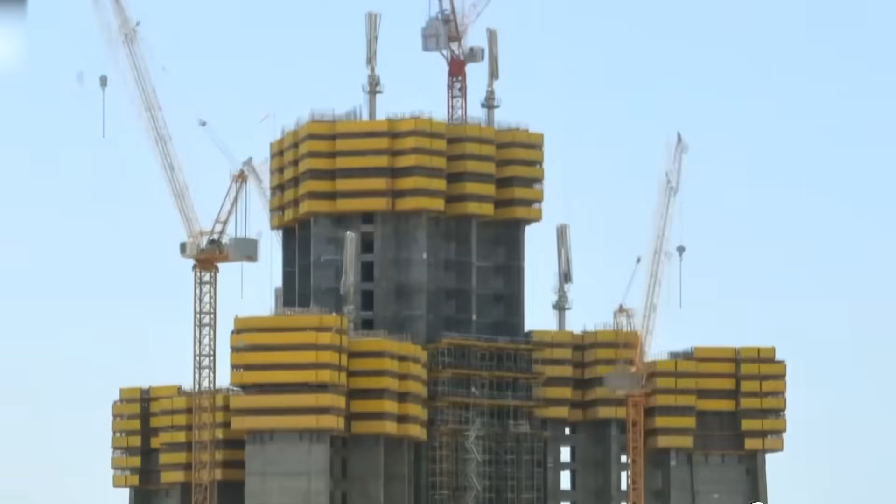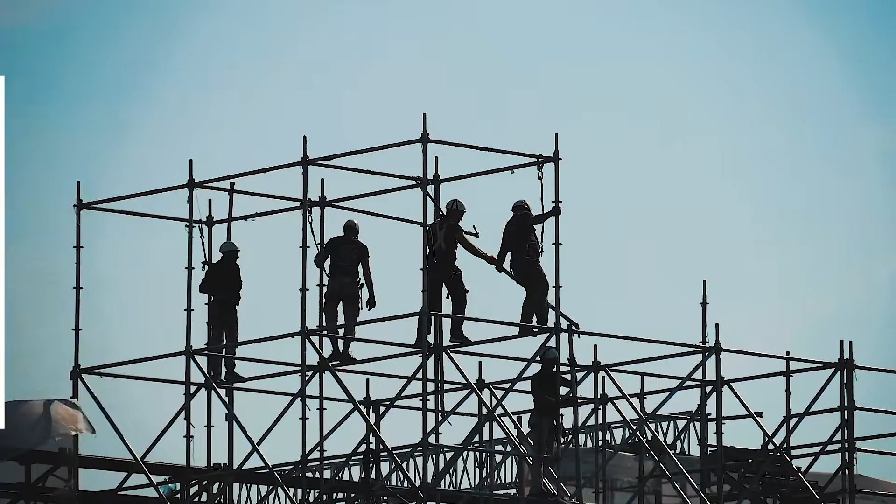Right now, as you watch this video, somewhere on the coast of Saudi Arabia, a tower is growing. Not by meters, not by weeks, floor by floor, every single day. This is the Jeddah Tower, and it is on a mission to become the tallest structure ever built by human hands. 1 full kilometer into the sky.

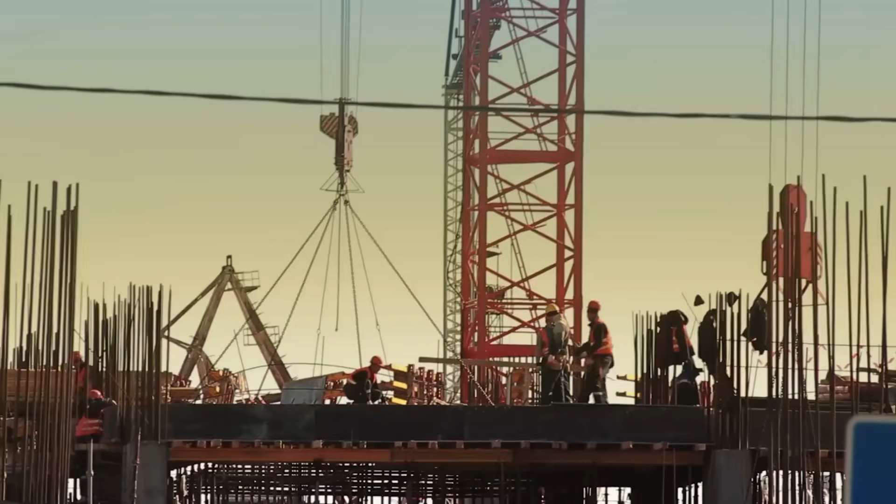That's taller than any building in history. Taller than the Burj Khalifa by 173 meters. So tall that at the top, you will literally be standing in the clouds. But here's what makes this story insane.

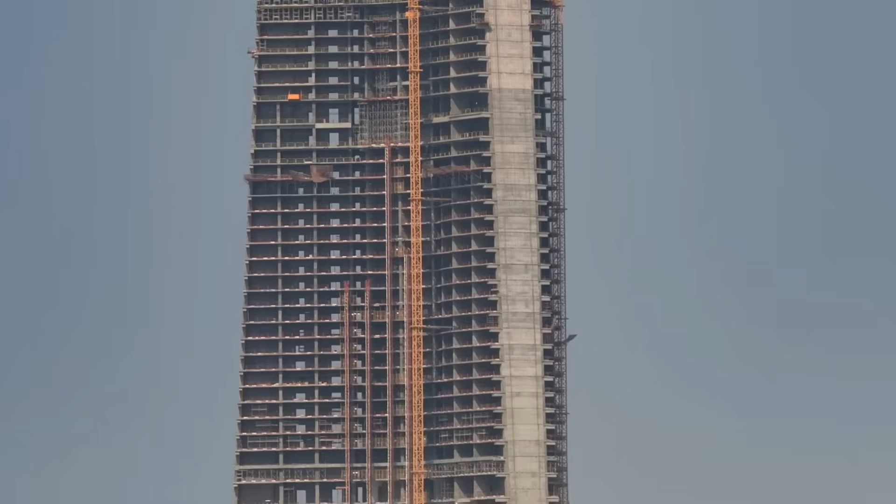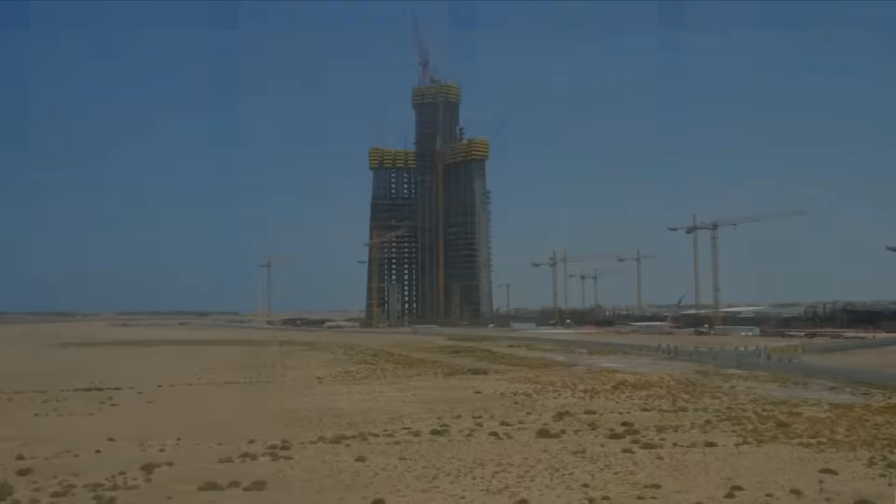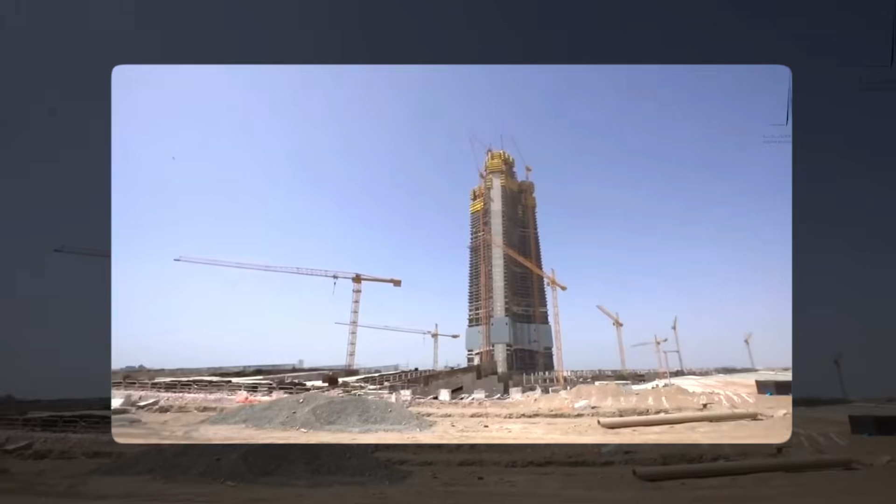This tower was abandoned for 7 years, left as a concrete skeleton on the Saudi coastline, the ghost of an impossible dream. And now, it's back, faster than ever, racing to reach a milestone that has never been touched in the entire history of construction. This is not just a building story. This is a story about ambition, power, arrest, billions of dollars, and a race against time. Let's go.

The year is 2008. Saudi billionaire Prince Alwaleed bin Talal stands in front of his team and makes an announcement. He wants to build the tallest tower in the world. Not just taller than the Burj Khalifa, which is still under construction at the time. He wants to go 1 full mile into the sky. 1 mile. That's 1,600 meters. Nearly double what would eventually become the Burj Khalifa.

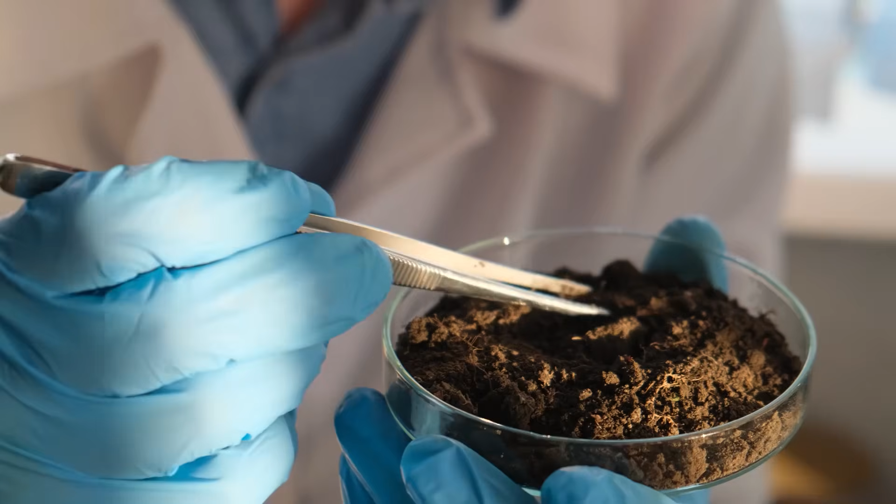The engineers told him it was impossible. The soil tests came back and confirmed it. The ground in Jeddah cannot support a 1-mile tower. The plan had to be scaled back, so instead, they settled for 1 kilometer. Just a kilometer, no big deal.

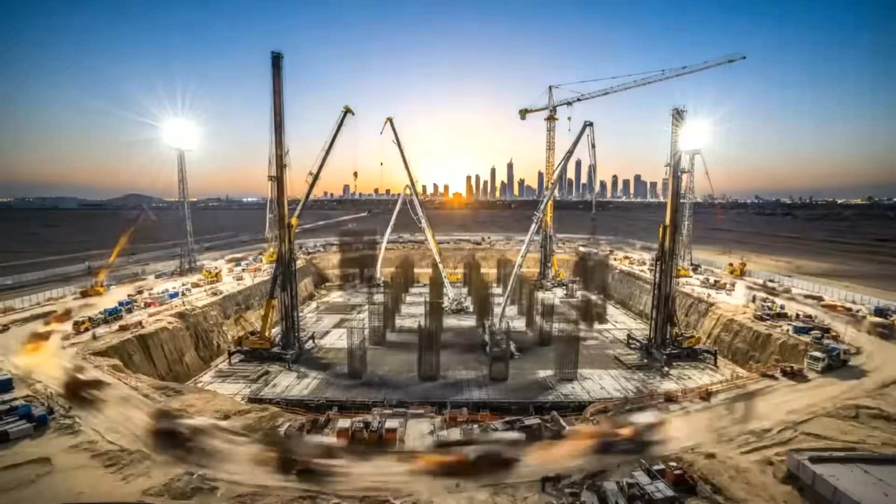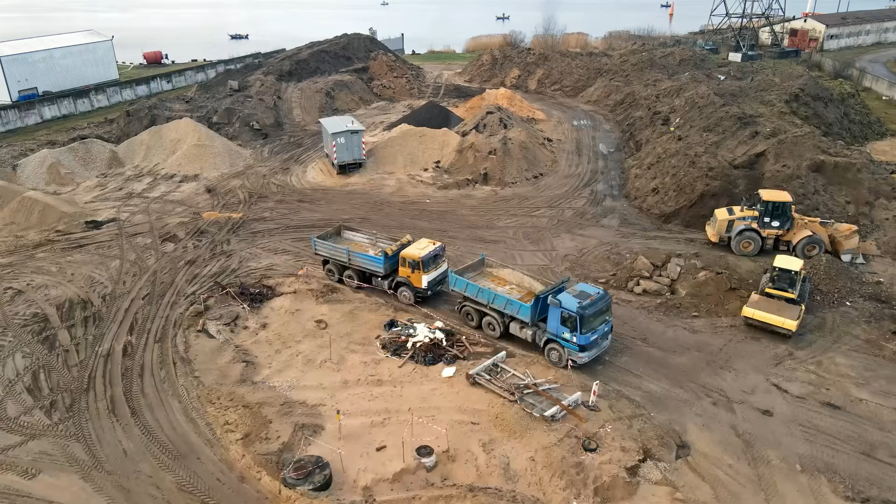Construction officially begins in 2013. The architect is Adrian Smith, the same man who designed the Burj Khalifa. The contractor is Saudi Binladin Group, one of the most powerful construction firms in the Middle East. Everything is aligned. The money is there. The talent is there. The ambition, off the charts. And then, Saudi Arabia shook.

November 2017, Crown Prince Mohammed bin Salman, MBS, launches what he calls an anti-corruption purge. Hundreds of powerful Saudis are rounded up, arrested, held inside the Ritz-Carlton Hotel in Riyadh. Yes, a luxury hotel becomes a prison.

Among those detained, Prince Alwaleed bin Talal, the man behind the Jeddah Tower, and Bakr bin Laden, the chairman of Saudi Binladin Group, the main contractor building the tower. Half-brother, by the way, of Osama bin Laden. The 2 most powerful men behind the world's most ambitious skyscraper, both arrested within weeks of each other.

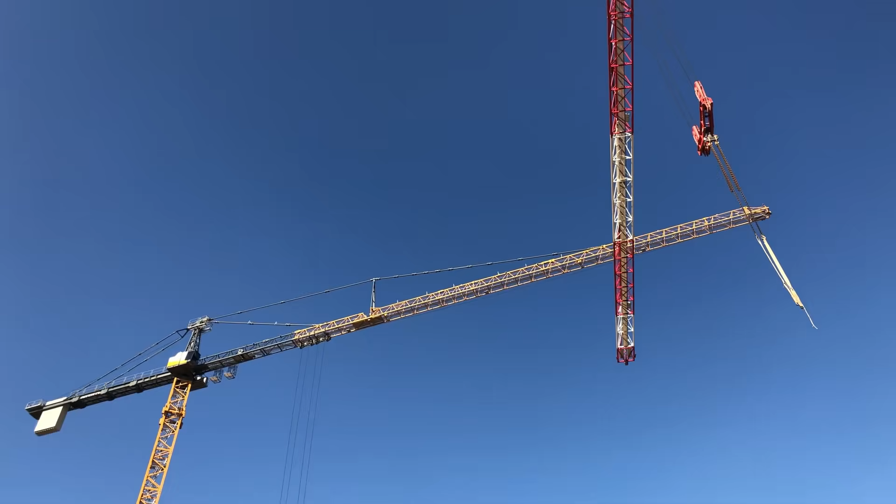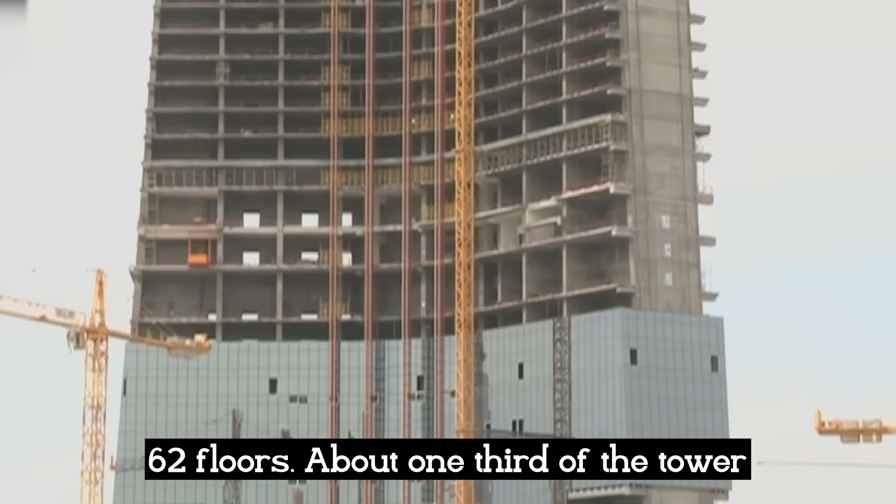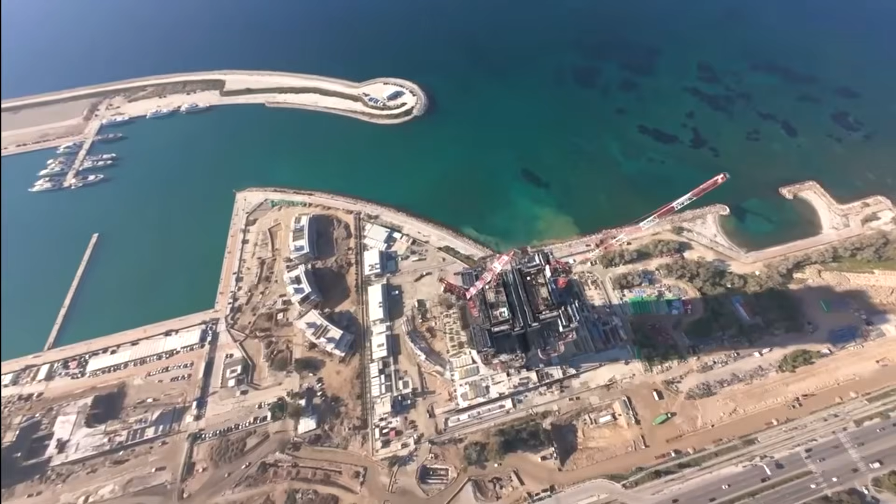Construction limps on for a few months. Workers show up, cranes keep moving, but the leadership is gone, the money is frozen, and by January 2018, everything stops. 62 floors, about 1/3 of the tower, done, and then silence. The cranes stopped moving, the site went dark, and for 7 years the Jeddah Tower stood as an unfinished concrete shell. A monument to what happens when ambition collides with power.

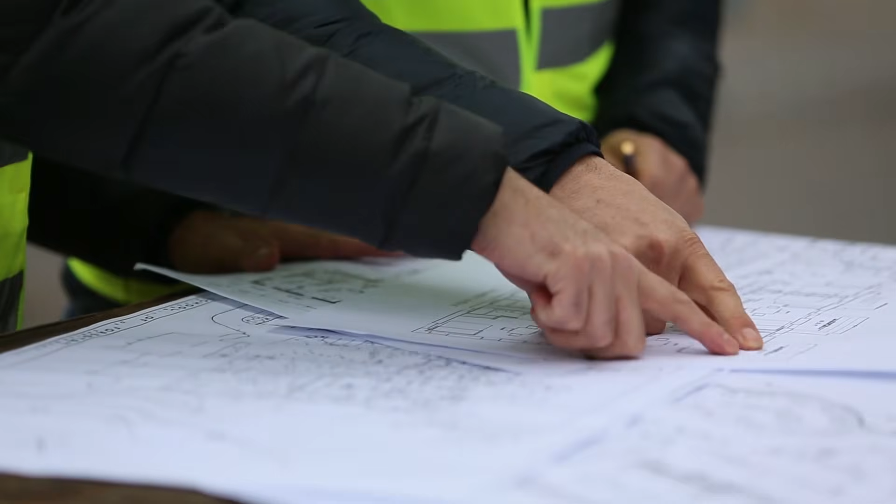But here is the twist. Alwaleed was released after 3 months. He paid an undisclosed settlement to the Saudi government. Bakr bin Laden walked free in 2021 after 3 years. And the firm that was arrested, Saudi Binladin Group, they were hired back in 2024 to finish the very tower their chairman had been arrested for. You genuinely could not write this.

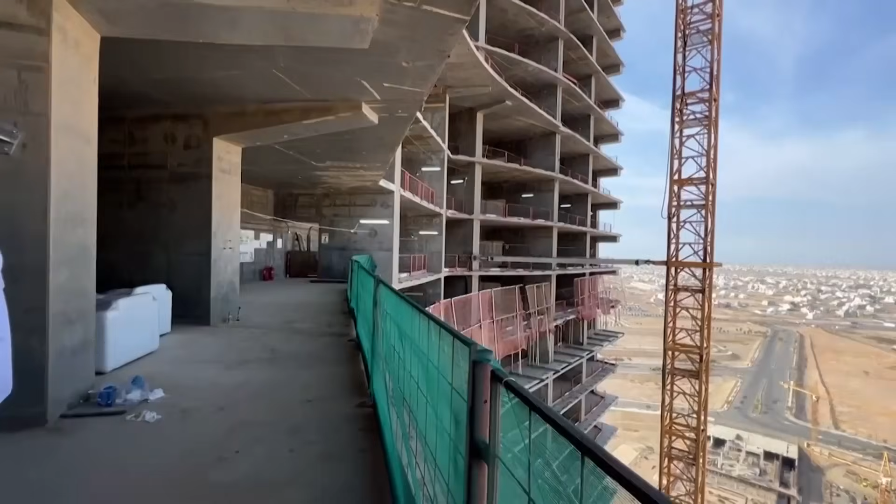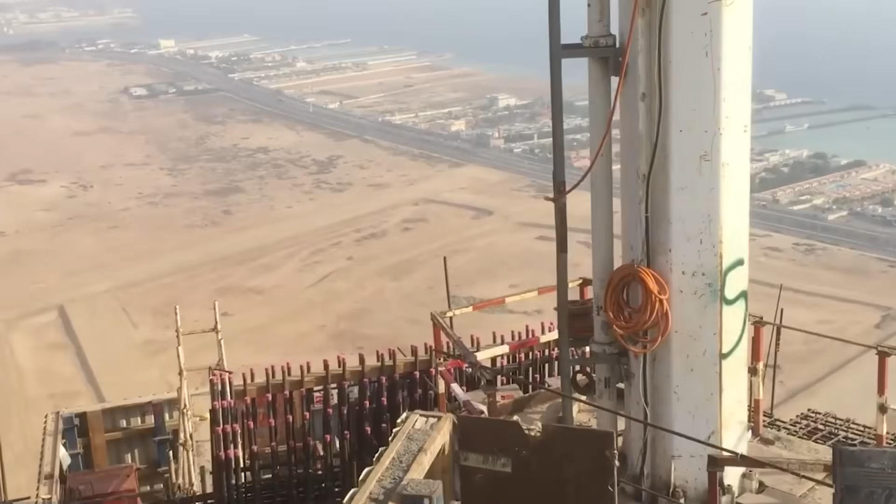Between 2018 and 2023, the Jeddah Tower stood frozen. COVID hit. The Saudi economy shifted. Oil prices went through cycles, and the tower just waited. Satellite images from those years show an eerie sight. A massive construction site, cranes still standing, but nobody home.

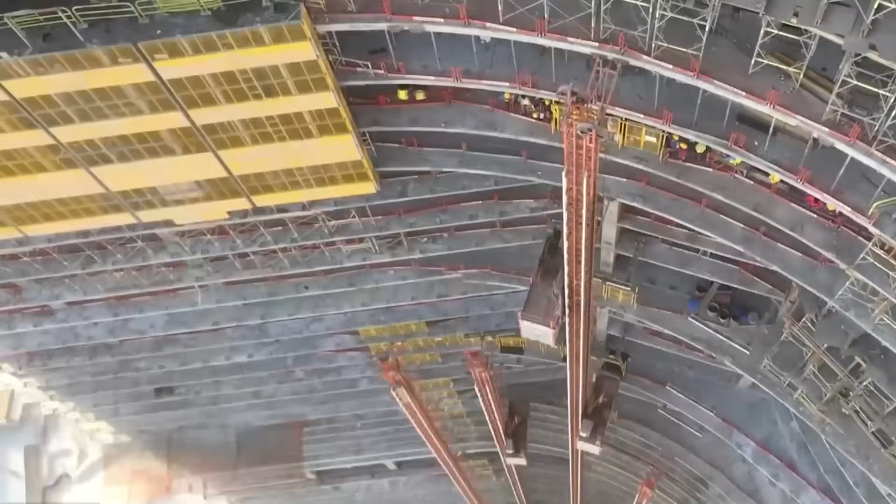Then in September 2023, something changed. Jeddah Economic Company quietly sent out requests for bids. 14 contractors from Europe, China, and the Middle East were invited to submit proposals to finish the job. It was happening. In October 2024, a ceremony was held on site. Prince Alwaleed himself showed up. He posted a video on X, a gleaming render of the finished tower, with a single caption, "We're back."

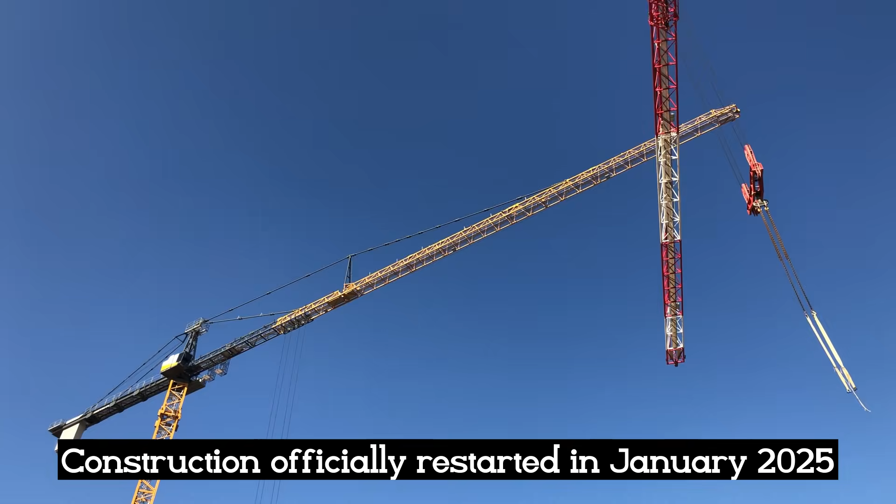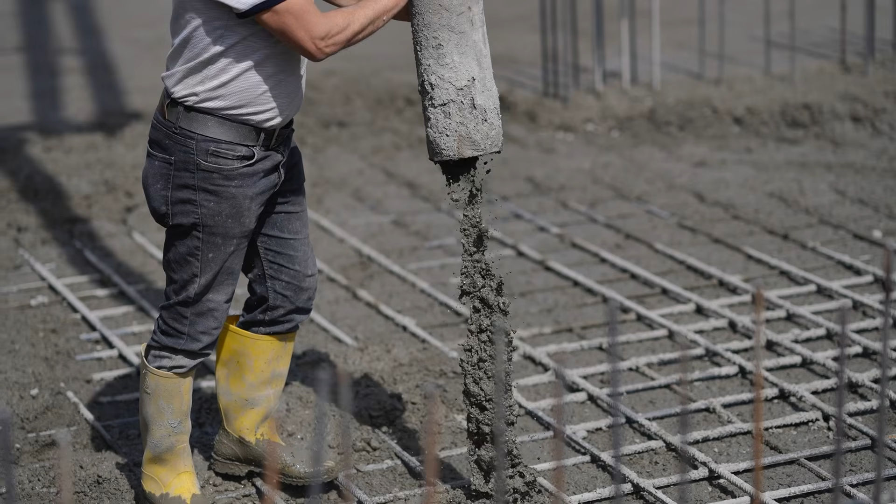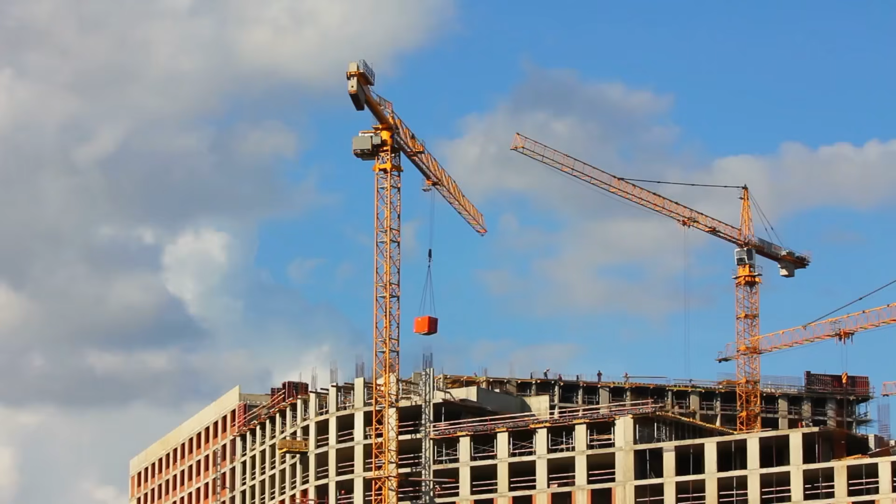Construction officially restarted in January 2025. And what happened next shocked even the engineers. When construction resumed, the pace was unlike anything seen before on this site. One floor every 3 to 4 days. Think about what that means. You go to sleep. You wake up. The tower is higher. Multiple cranes working around the clock.

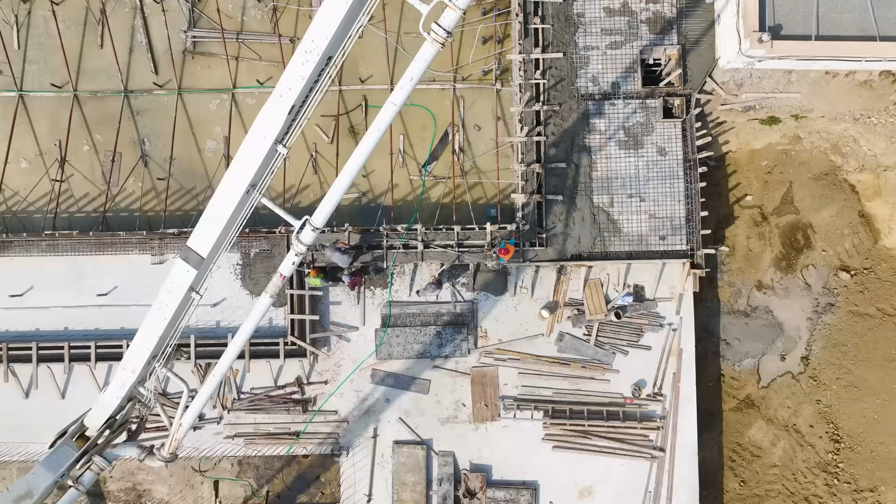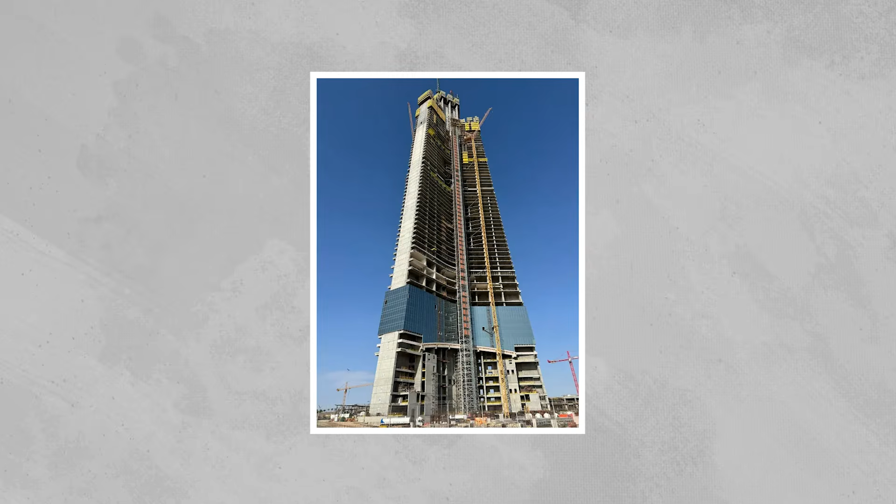Advanced pumpcrete systems pushing liquid concrete upward through pipes, hundreds of meters into the air. A workforce of over 5,200 people on site daily. By April 2025, just 3 months in, the tower had reached its 66th floor, past where construction had stopped in 2018. By August 2025, it passed 75 floors.

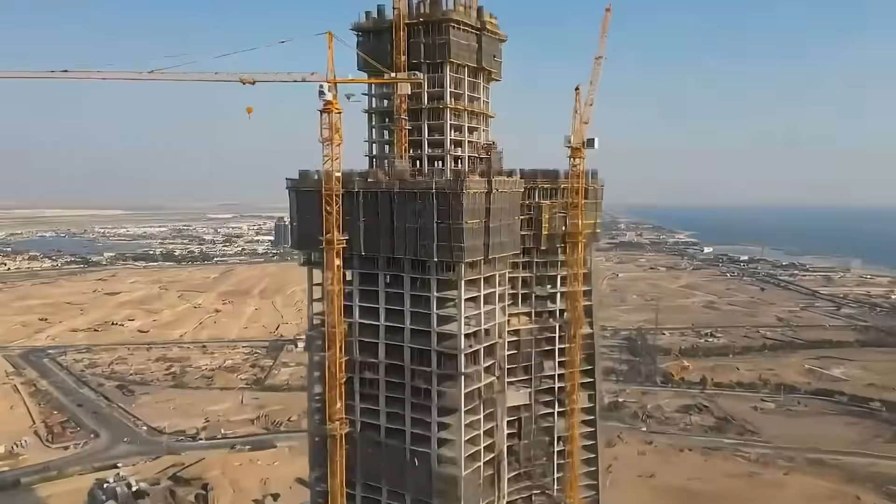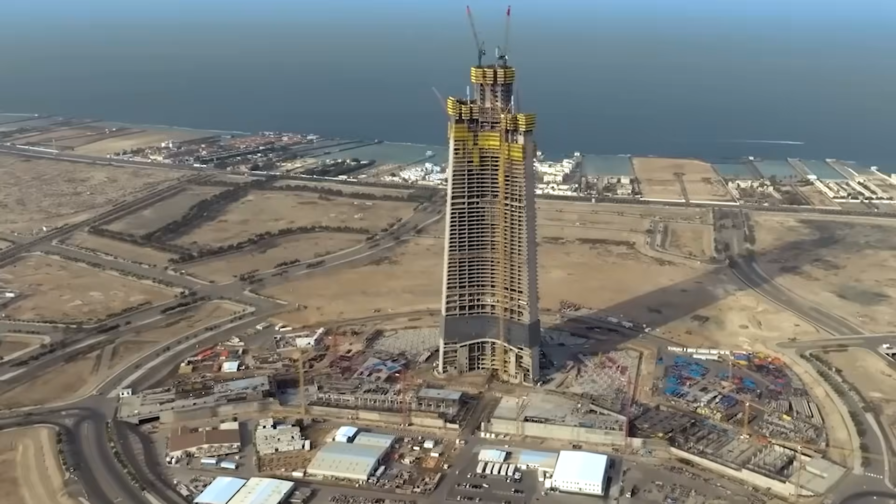By December 2025, it crossed 80 floors. And as of this video, the tower has passed its 95th floor, standing at 370 meters tall. It is on track to reach its 100th floor in the coming weeks. But the numbers alone don't tell the full story.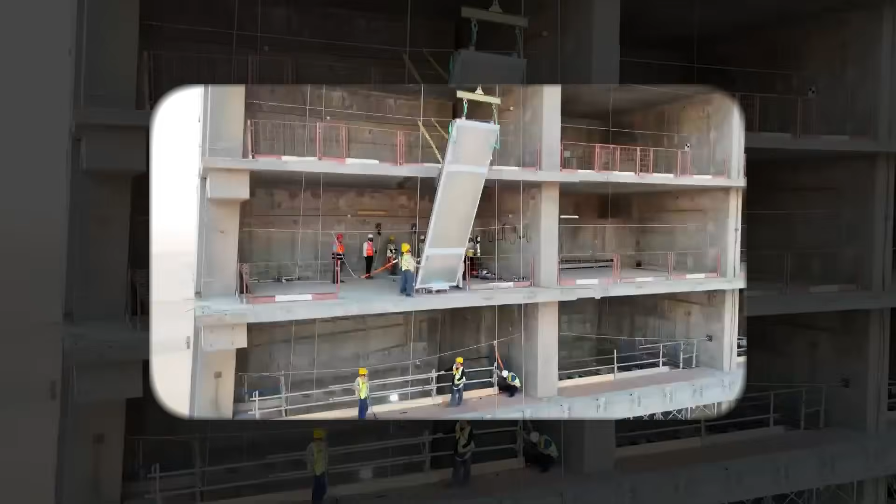Something remarkable is also happening on the outside of the building. Facade cladding has already begun. The glass exterior panels are being installed as the structure rises, which means the tower is not just growing upward, it is being finished as it goes. Mechanical, electrical, and plumbing work is running simultaneously inside.

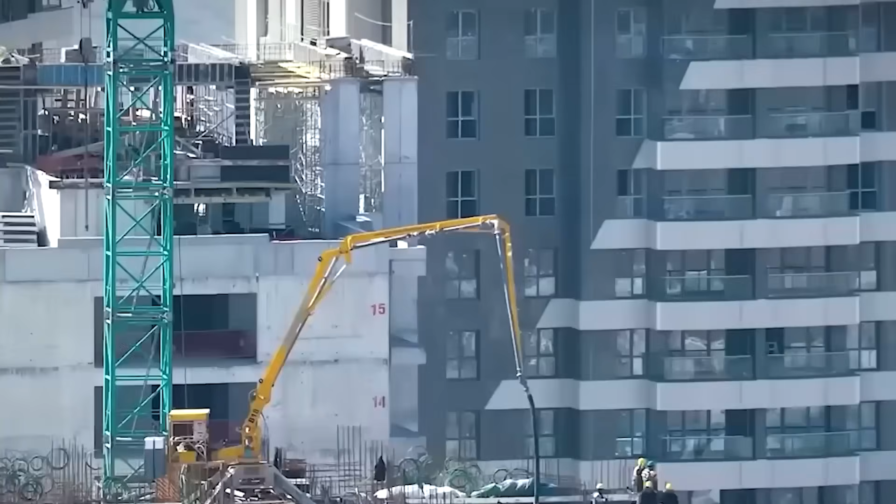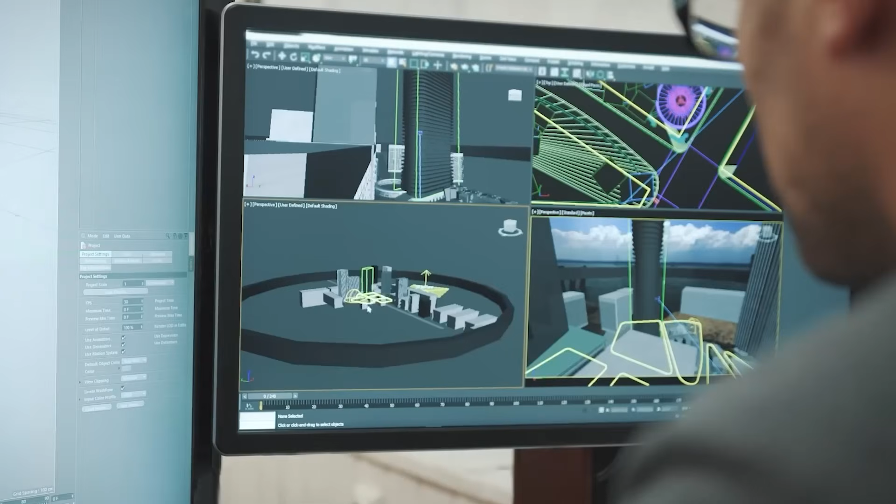This is not a construction site. This is a machine. And it hasn't had a single lost time injury. Over 8 million working hours. 0 fatalities. The structural engineers at Thornton Tomasetti confirmed in January 2026 that the core is performing exactly as modeled in wind tunnel tests. At 1 kilometer high, the wind forces on this structure will be extraordinary.

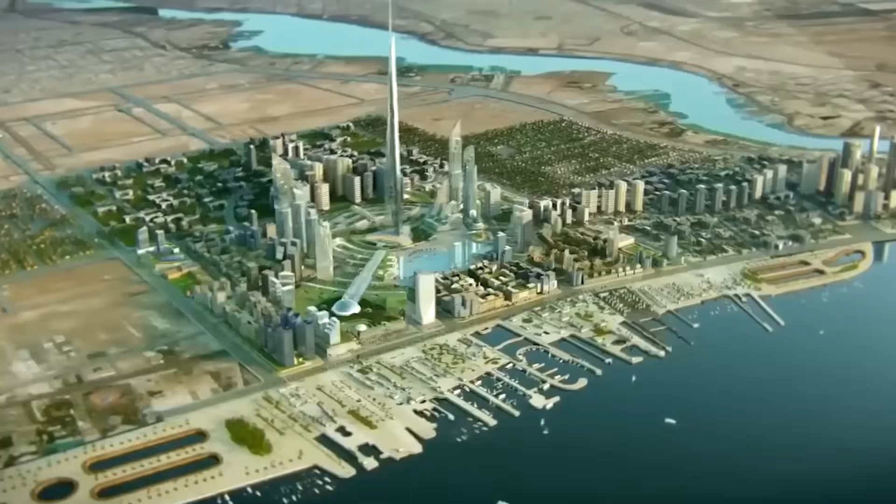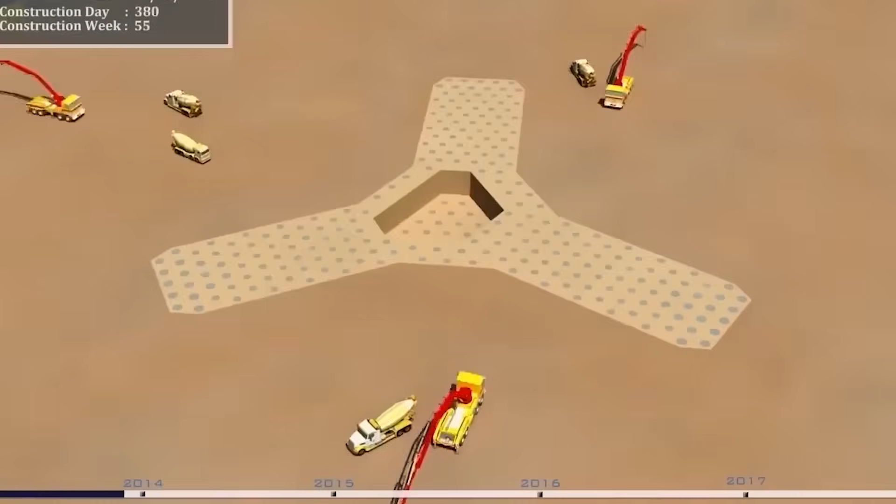But the 3-petal footprint of the tower, that distinctive triangular flower shape, is not just for looks. It sheds wind vortices. It reduces structural sway. It is aerodynamic engineering at its most extreme. When this tower opens, currently targeted for 2028, what will you find inside?

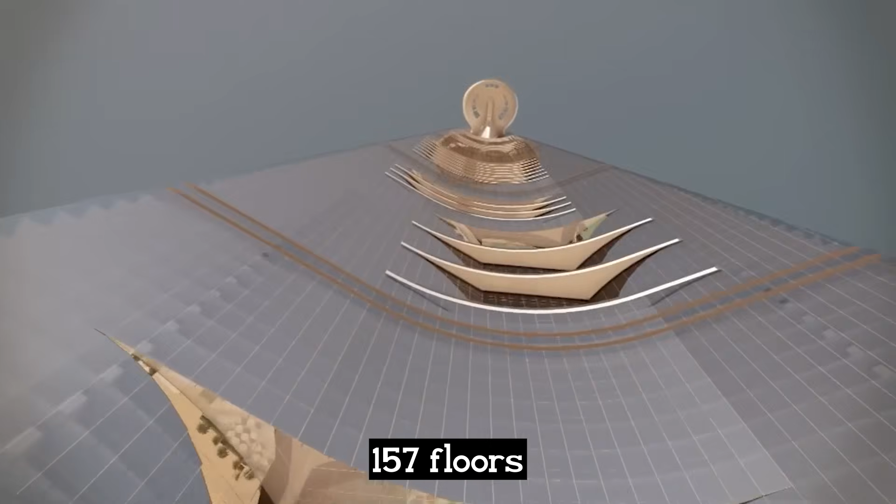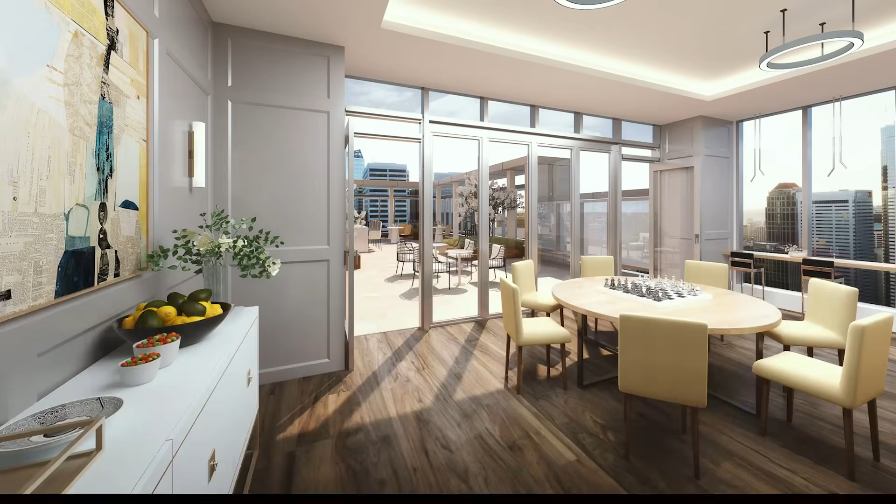157 floors. That's 20 more floors than the Burj Khalifa. A Four Seasons hotel occupying the upper floors. Luxury serviced apartments. Class A office space. High-end condominiums. And at 630 meters up, the world's highest observation deck. A cantilevered sky terrace looking out over the Red Sea.

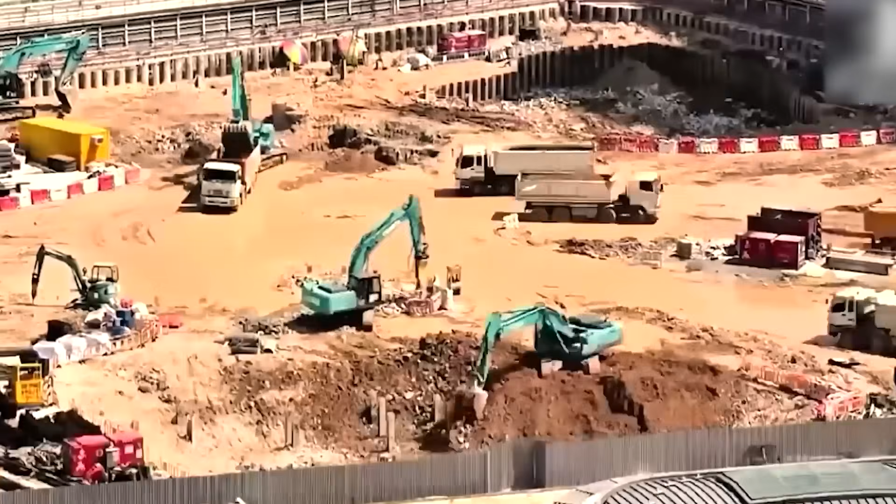To move people through this vertical city, 59 elevators, 3 sky lobbies, so no single elevator has to travel the full kilometer. Because at that height, the elevator cable alone would be impossibly heavy. The foundation? A thick concrete raft supported by hundreds of bored piles, drilled deep into coastal limestone and coral rock, engineered specifically for this stretch of the Saudi coastline.

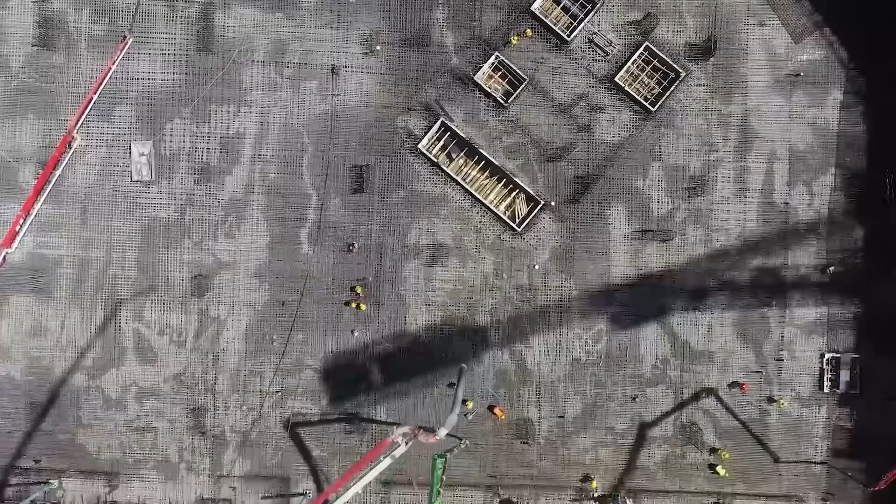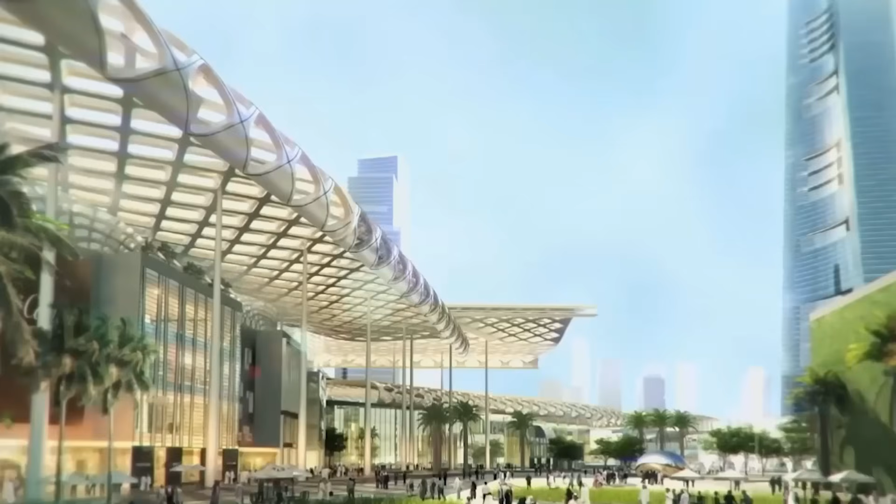And this tower is just the beginning. Jeddah Economic City, the development surrounding the tower, spans 57 million square feet. Hotels, malls, residences, a marina, a new urban district designed to transform northern Jeddah into a global destination. Saudi Arabia isn't building a tower. They are building a city around it.

Here is something that puts this entire project into perspective. While the Jeddah Tower is racing to become the world's tallest building, Saudi Arabia is already planning what comes next. The Rise Tower in Riyadh, a proposed 2-kilometer skyscraper, double the height of the Jeddah Tower, 6 times the height of the Eiffel Tower.

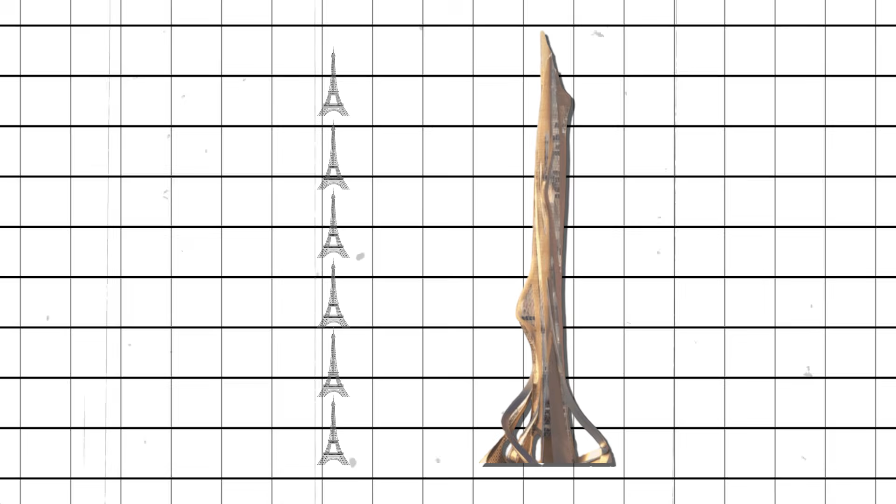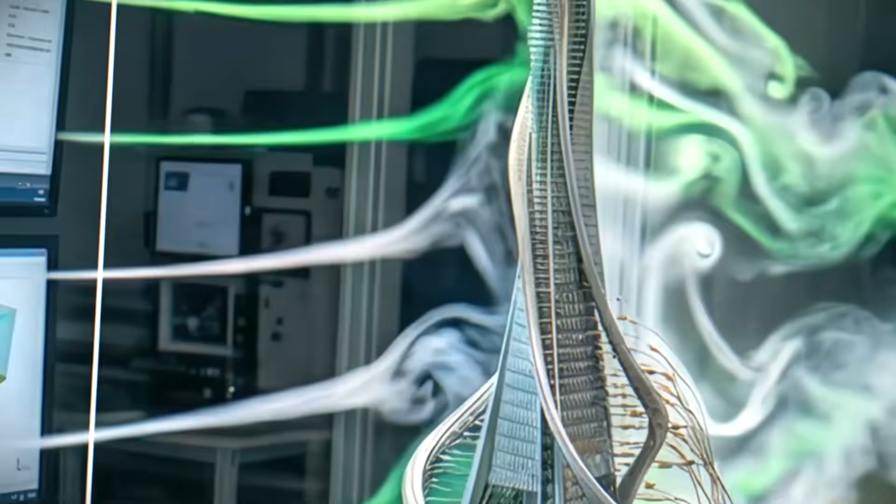That project is still in design and planning. Nobody knows if it will ever get built. But the fact that it is even being discussed, while the Jeddah Tower is still under construction, tells you everything about the ambition driving this region. This is not about having the tallest building. This is about rewriting what humanity believes is possible.

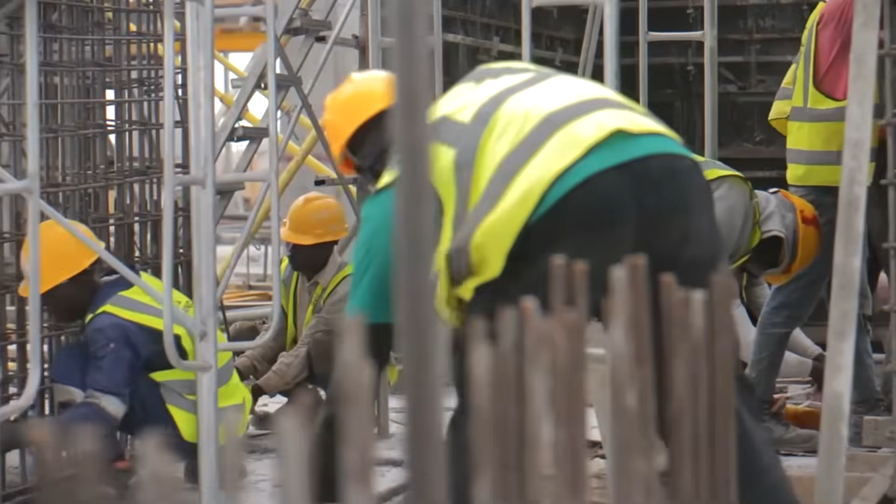The Burj Khalifa has held the title of world's tallest building since 2010. 15 years at the top. In 2028, if everything goes to plan, that reign ends. 173 meters taller, on the coast of the Red Sea, built by a country that was barely on the global skyline map 20 years ago.

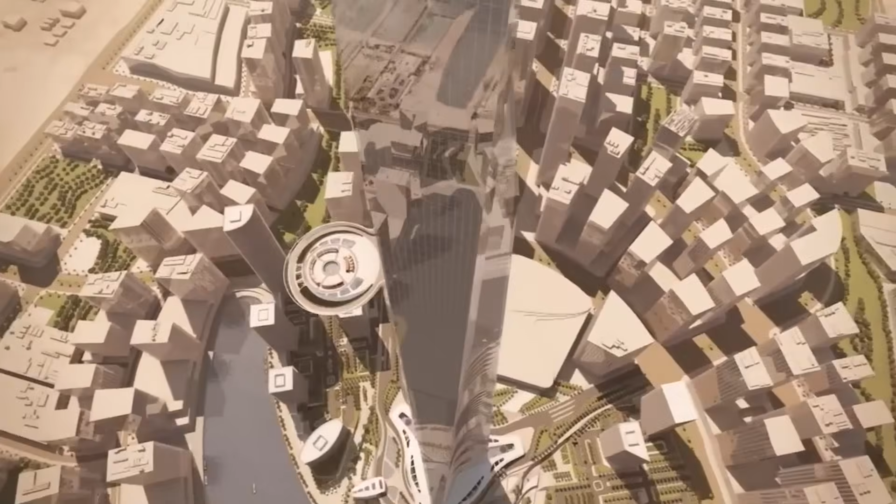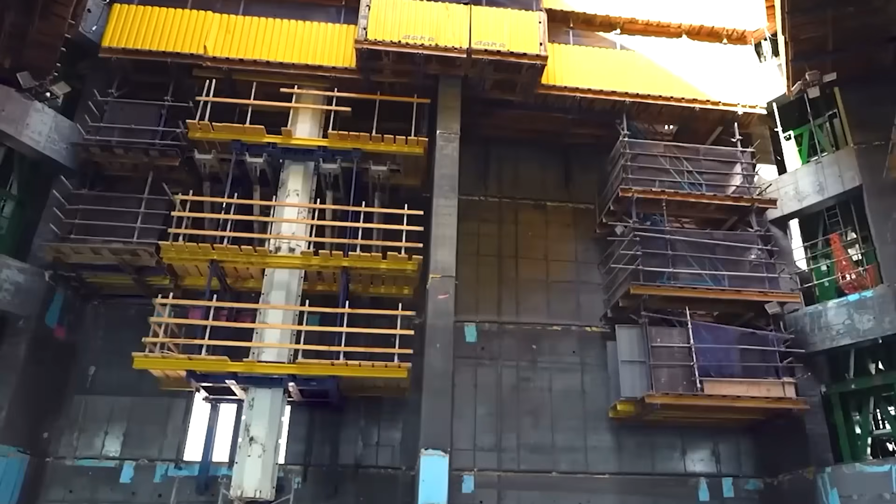And here is the thing about this race. The Jeddah Tower is not competing with other buildings. It is competing with what we thought was physically possible. 1 kilometer, straight up, from the ground. For thousands of years, humans built as tall as they could. Stone by stone, brick by brick. Now we are pouring concrete a floor every 4 days, at 400 meters above sea level. We have become something extraordinary.

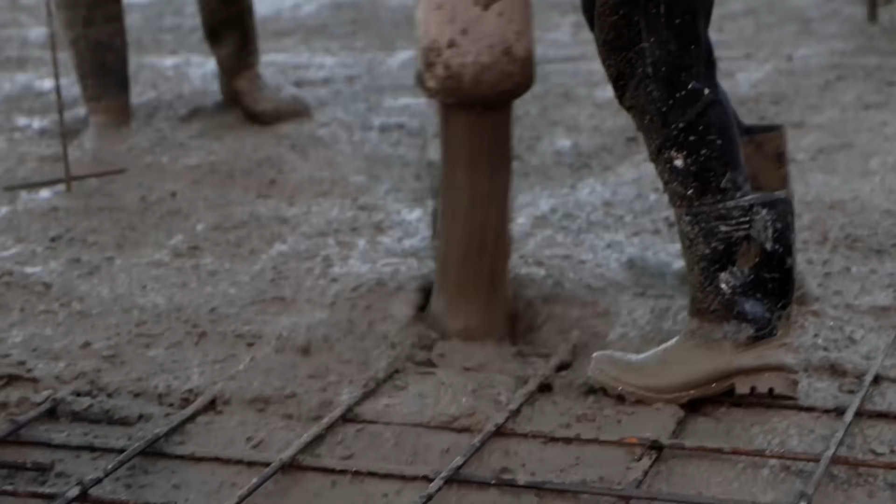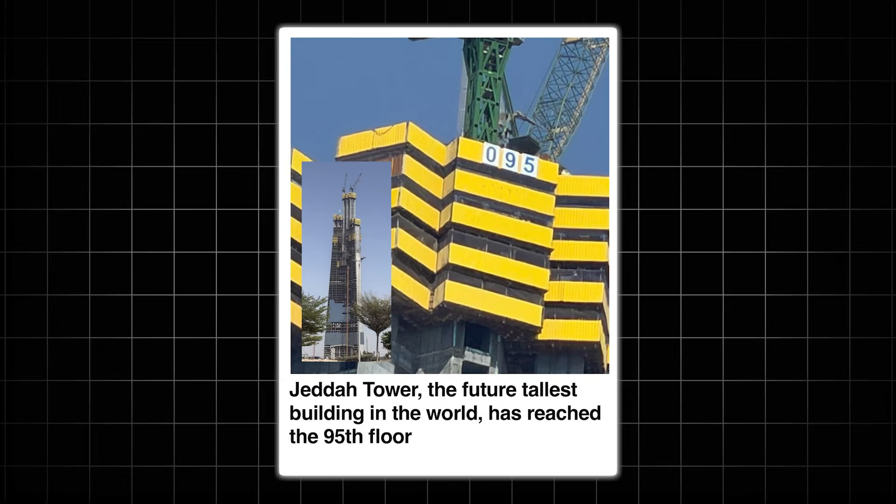So where does that leave us today? Right now, as you finish watching this video, Floor 95 is done. Floor 96 is probably going up. 5,200 workers, cranes, pumpcrete, glass panels, all moving all the time. The tower that was arrested, abandoned, left to stand empty on a Saudi coastline for 7 years, is alive again.

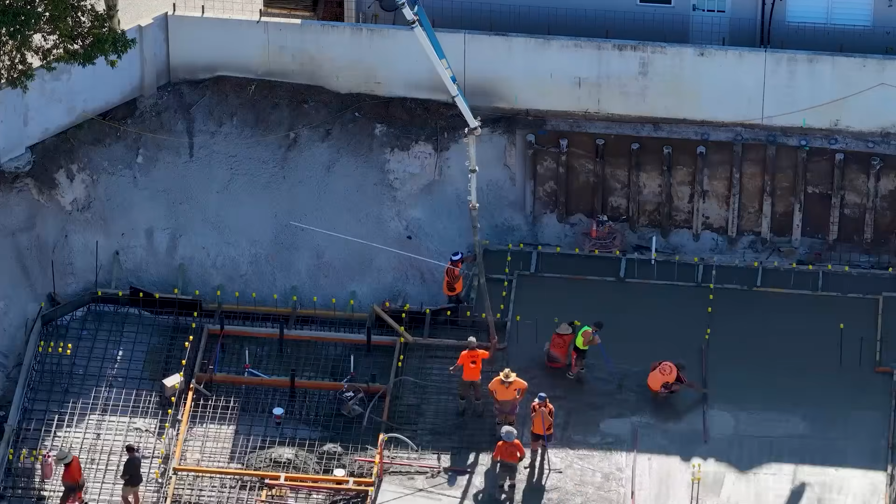And 2028 is the target. Will it make it? The pace says yes. The engineers say yes. The numbers say yes. But this project has been delayed before, arrested before, frozen before. So we watch, and we wait, and every few days, another floor. 1 kilometer, the first in human history, being built right now.